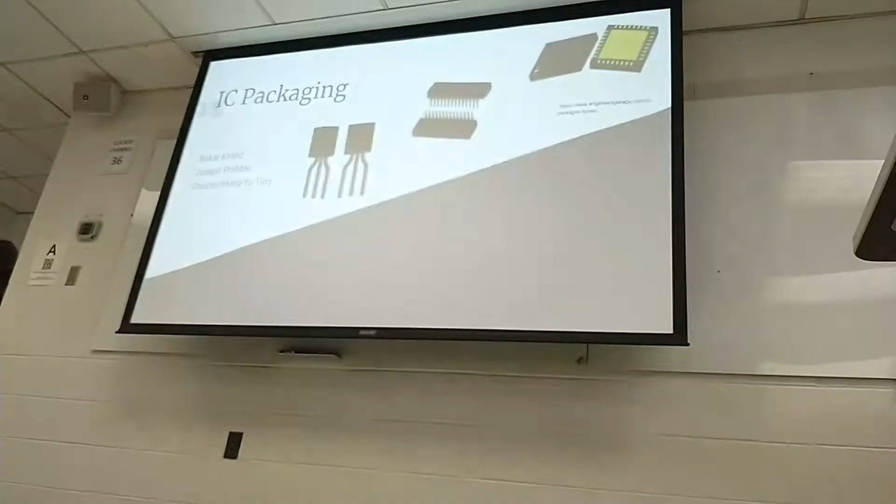Okay, so that's the first group. Bokar, Joseph, Chester, you all are here? Okay, please, come up front. Okay, so here's what we're going to do today. We're going to go through the last two group activities. And then we're going to talk about the exam. We're going to talk about lab reports. And we're going to talk about what a great opportunity this has been for us to work with you. This is our last lecture. And that's where we're going to end.

Okay? So you have about 15 minutes, longer than other groups because there's 3 of you, and 5 minutes Q&A, and then we start with the next group. Packaging is so important. You could have not 1 course, but 3 courses on that. Yes, that was the thing that we got into actually. Now, before you start, the rule of thumb is, and I want all of you to understand, hopefully those who are going to go into hardware, you always design the package at the same time with the electronics and the chips. If you design the package at the end, it's a 100% guarantee that you fail. Yeah, we're actually going to go over that too. Remember that. This is a golden lesson I learned the hard way. So take it with a lot of value. Okay, go ahead.

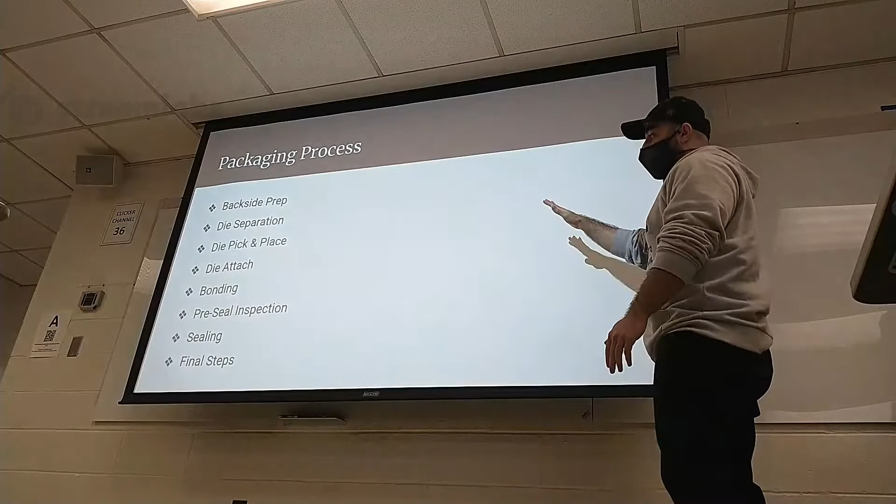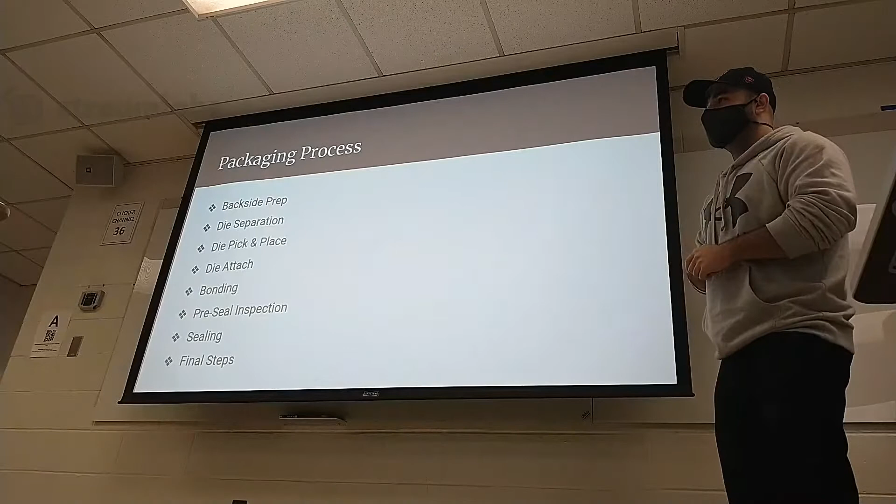So this is the whole packaging process. We have to go through these processes in order to get a complete package. But we are doing this in the context of electronic chips, right? Because this whole recipe changes dramatically for some other applications. Some of them will stay the same, but it doesn't necessarily follow the same order. Yeah, we have a slide at the end that basically goes through this.

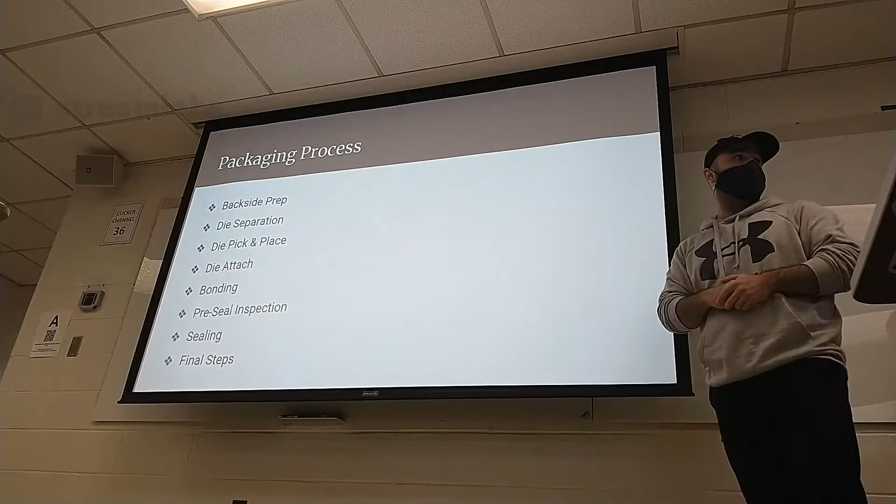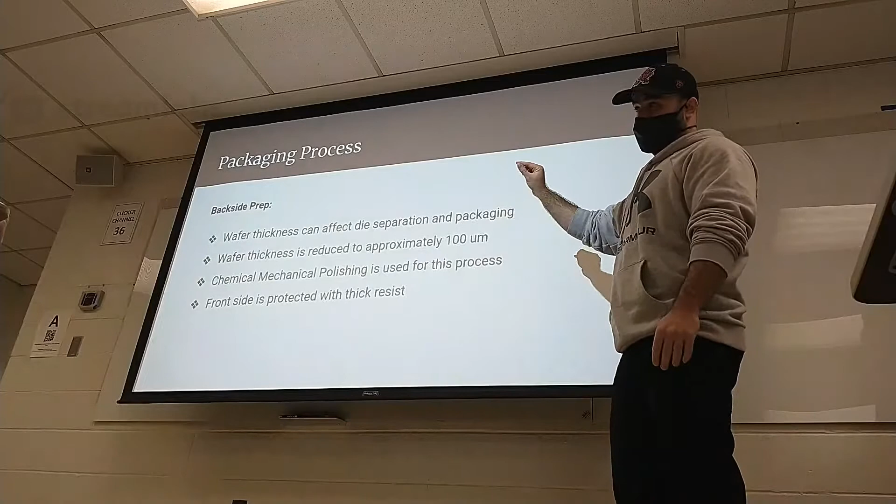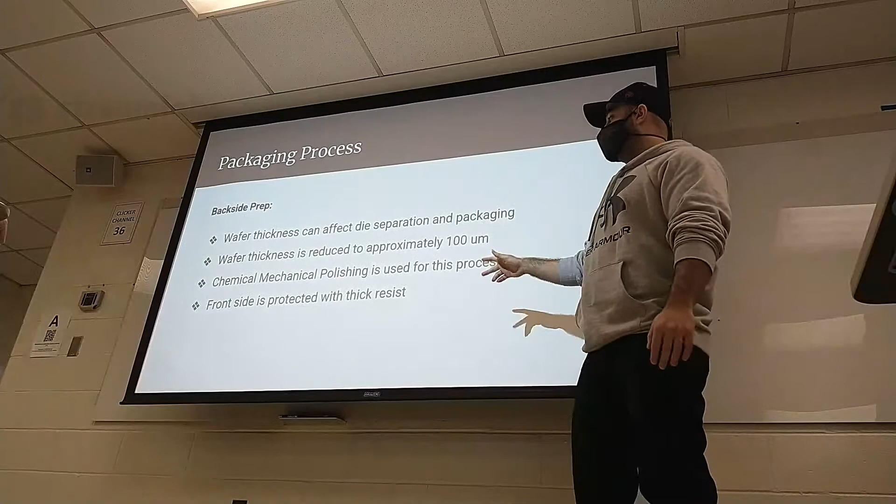So this is the packaging process. The first one is backside prep, basically the backside of the wafer. The wafer thickness can affect the steps that follow, which are die separation and packaging. So we reduce the thickness to approximately 100 microns, and the technique we use is chemical mechanical polishing, which was discussed by the other group. When we do this, we have to cover the front side with a thick resist.

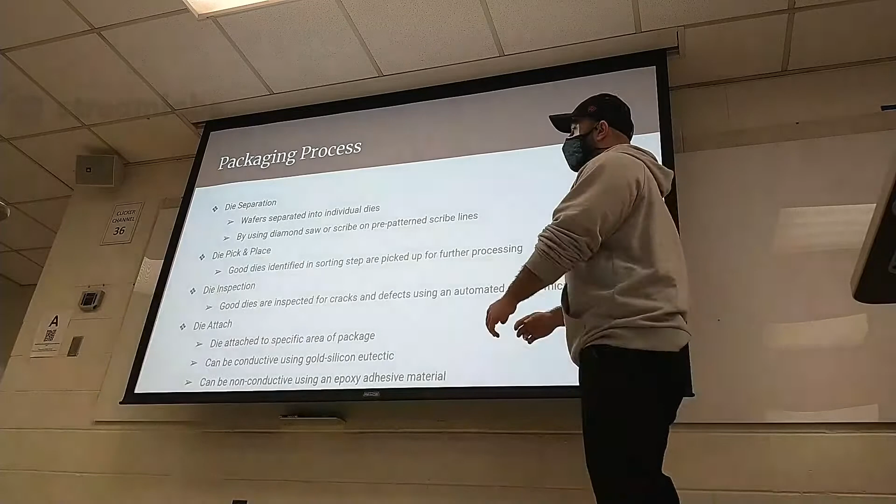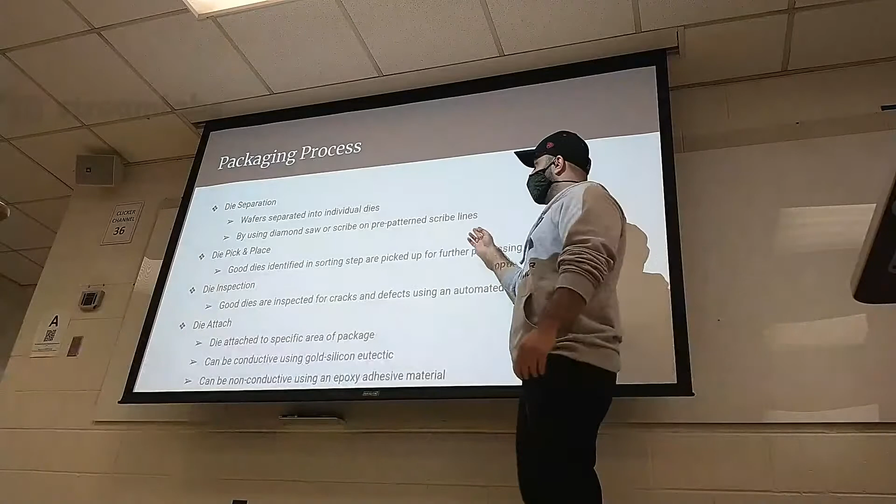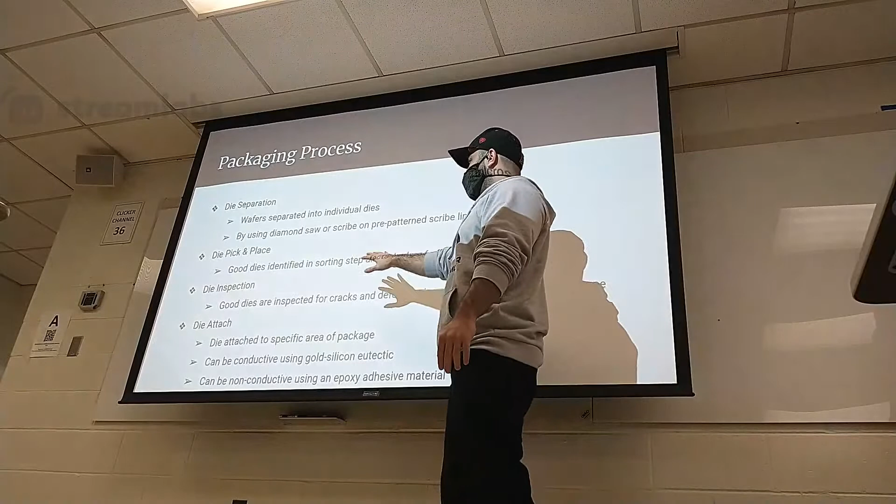The next step, after we prepare the backside, is die separation. We separate each die on the wafer using a diamond saw along a pre-patterned scribe line. After that, we pick and place the die. We identify the good dies from the sorting step. In the sorting step, each die gets electrically tested, and the bad ones get marked.

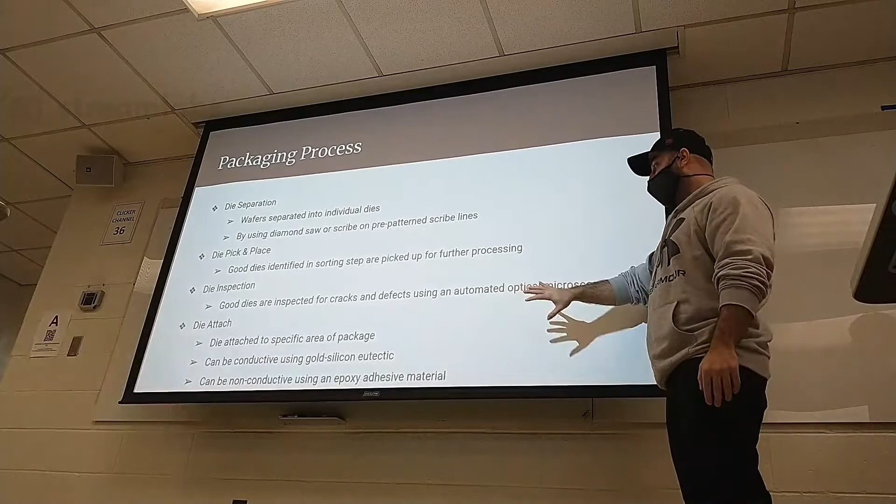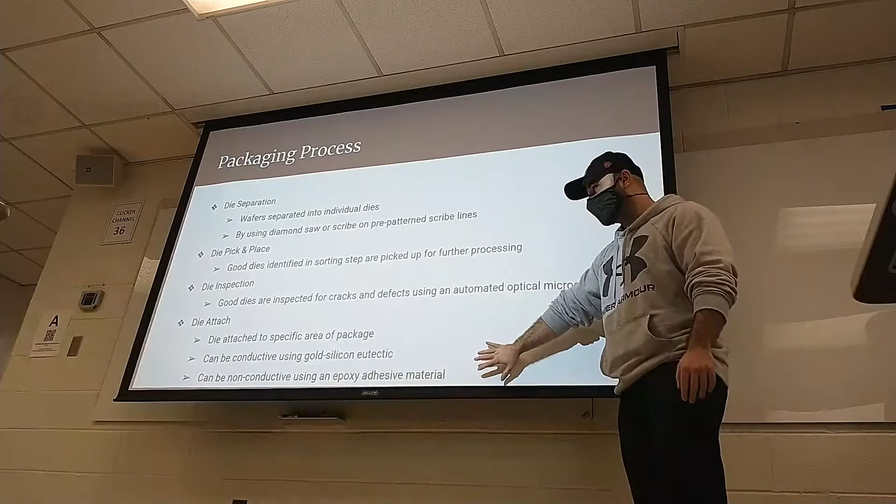Once we pick the good ones, the next step is die inspection, where we look for cracks and defects on the dies, and this step is handled by an automated optical microscope. Once we're done with die inspection, we go to die attach, where we pick the good ones and put them on the package.

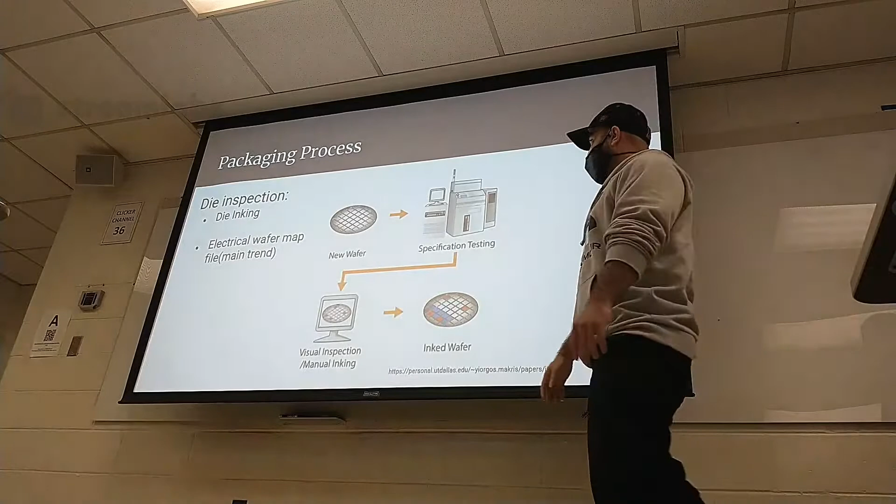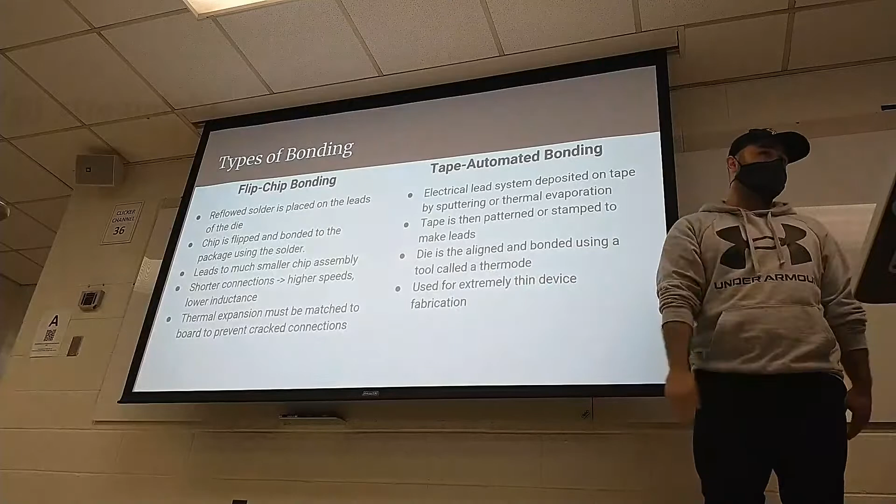And in the next step, we're going to be talking about the bonding, how the bonding is going to work. And I'm going to pass it down to my colleague. He's going to explain how that process is done. Hey guys, my name is Joe. I'm here to introduce just some types of bonding that can go into IC packaging.

Now, bonding is one of the most important steps in IC packaging. This is where the leads from the IC are actually connected to the board. So one of the types of bonding I'll talk about is flip chip bonding, which is basically the reflowed solder is put onto the leads of the die, and then the chip is flipped, hence the name, and bonded to the package using the solder. So hot air or heat is applied to melt the solder and establish the connections.

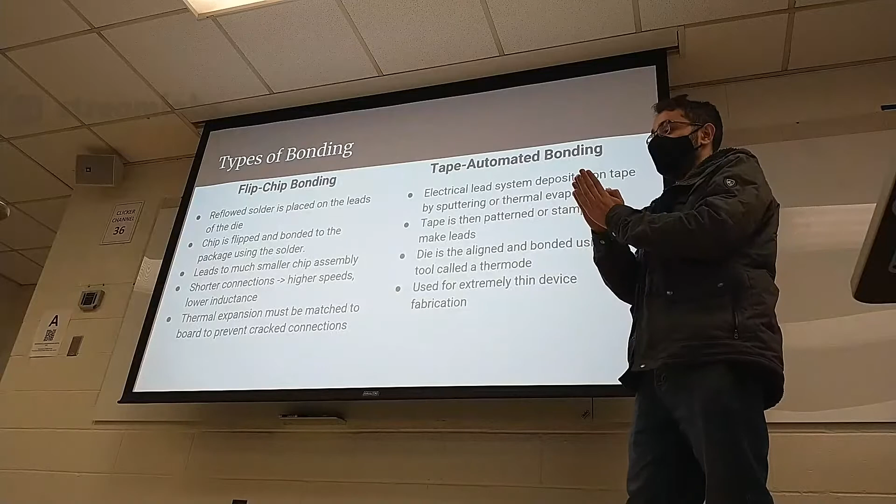This leads to much smaller chip assemblies because you can have much denser connections, and since you're not really having wire, it's mounted directly to the board. That also reduces space as well. This leads to much shorter connections, which is higher speed and lower inductance. But one disadvantage might be that thermal expansion could occur. So you have to match it to the board to prevent cracked connections.

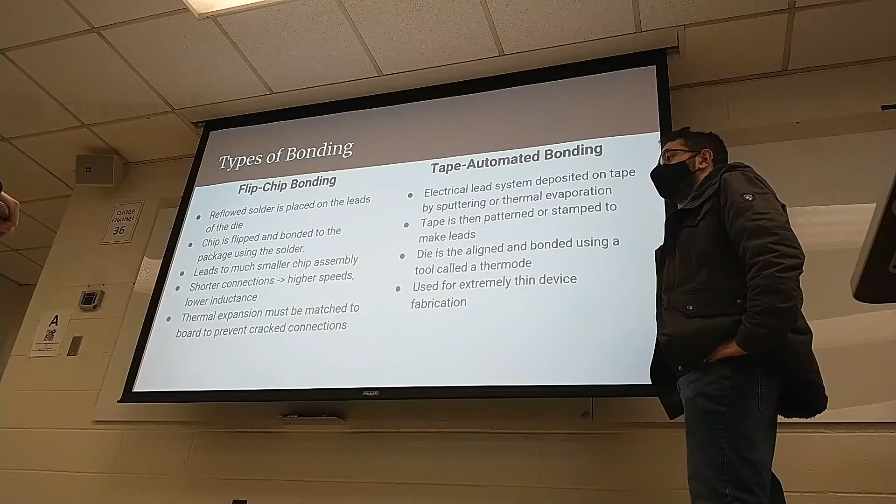So this electronic chip needs to work at 110 or 115 degrees Fahrenheit in Death Valley, and it should also work in minus 25 degrees in Minneapolis, Minnesota, right? So that's what you mean by thermal variation. Yes. Because if any of your package electronics in your iPhone goes through some form of cracks, that's the end of the product. Exactly. Because you can't go back. Yeah. I'll go into detail in another slide, but this is a type of surface mount, which means once it's done, it's done.

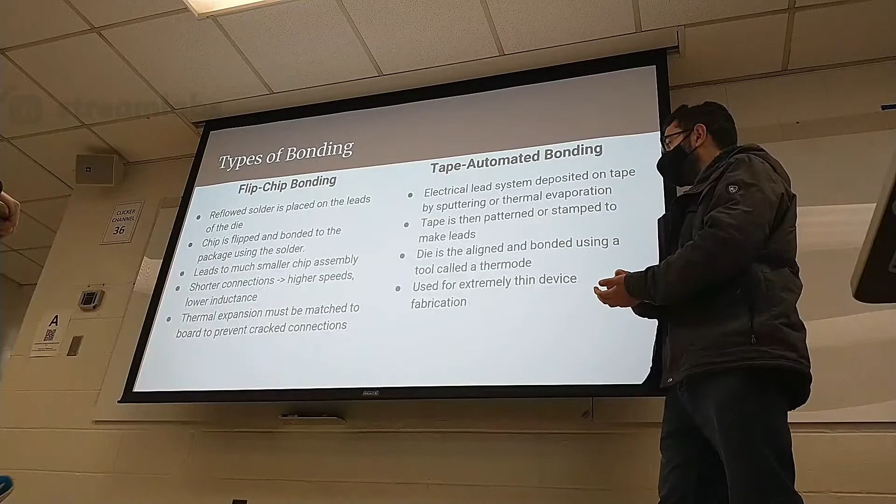So another type of bonding is tape automated bonding, and that is where the electrical lead system is deposited onto a tape via sputtering or thermal evaporation. The tape is then stamped or patterned to make the leads to the actual IC. The die is aligned, and the die is bonded using a tool called a thermode, which is basically like a hot press. It actually forms the bond. And this is used for extremely thin device fabrication. Since it's pressing it down and establishing the bonds, that makes it nice and thin.

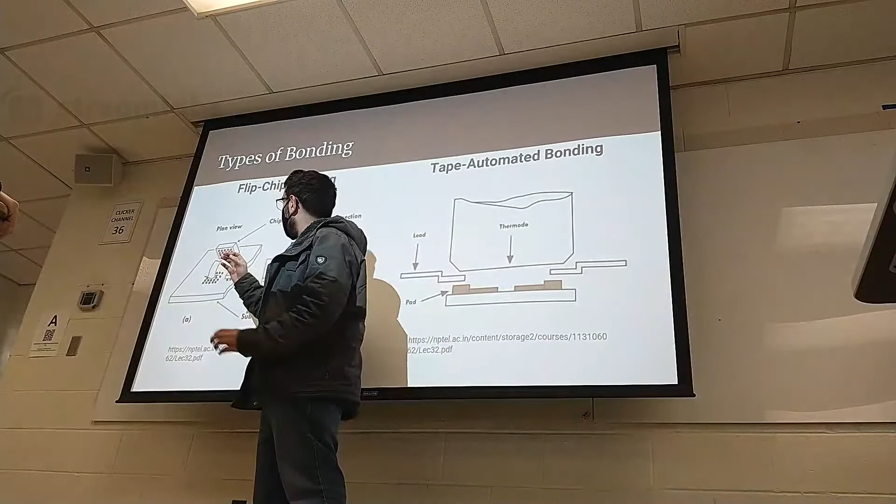And then here's another representation of the flip chip. So this is the solder which is deposited on the IC, flipped, and it establishes the connection right there, as you can kind of see. I'm going to pass it over.

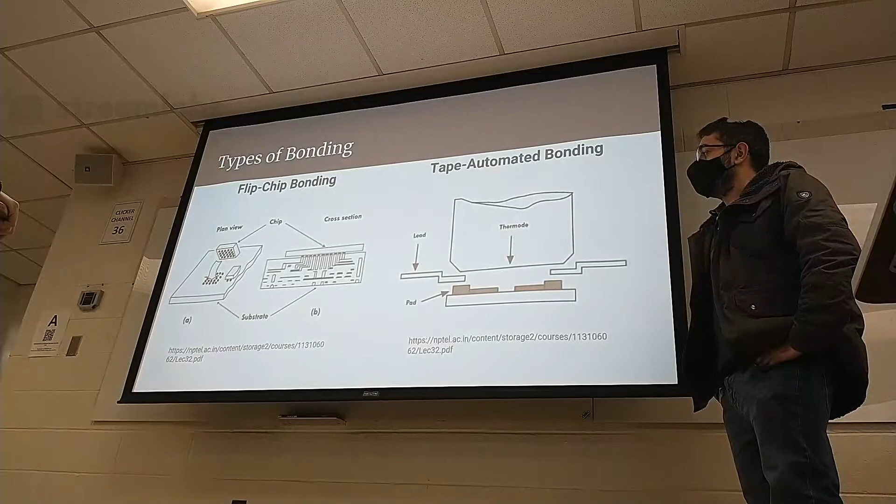So if any of your layers that you put in to make your electronic chips and your transistors has exceeded the stress, remember we talked about stress, compression, and tensile, halfway through the semester? If any of those layers exhibited more intrinsic stress than it's supposed to, guess what happens when you put the pressure for this flip chip bonding? Cracks, right? Exactly. So this is how the final product comes to realization. If you have not done your reliability tests at each layer and characterized it, it's going to come and haunt you at the end.

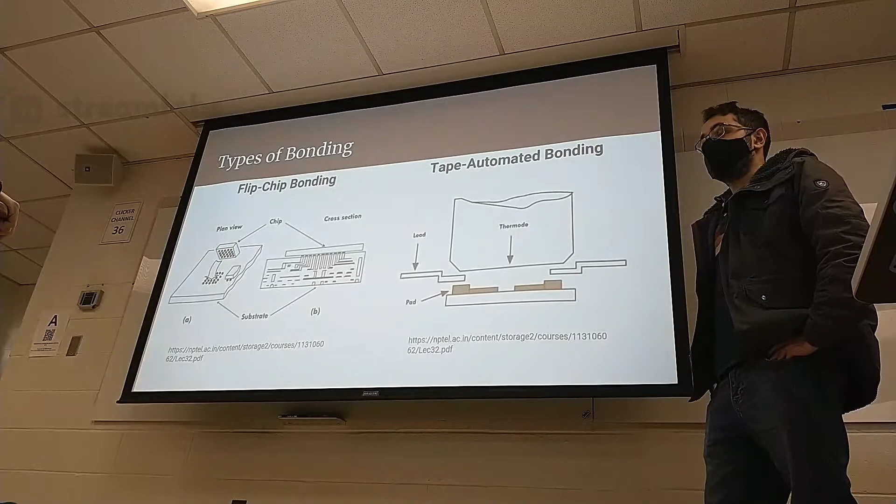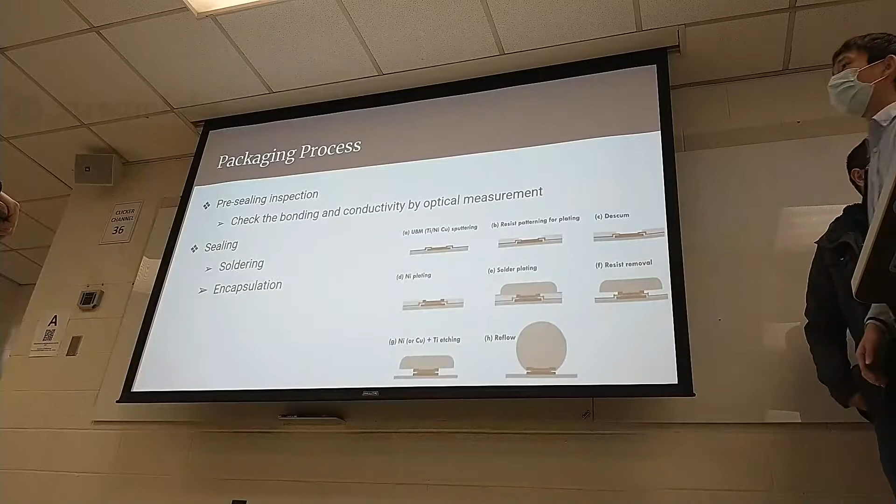Exactly. Just as Dr. Gatsi said, there's a lot of planning that needs to go into every single step. So my colleague Chester is going to take over. Hi, I'm Chester. And that comes to the pre-sealing inspection. You want to check the bonding is not missing, and also that the conductivity still works.

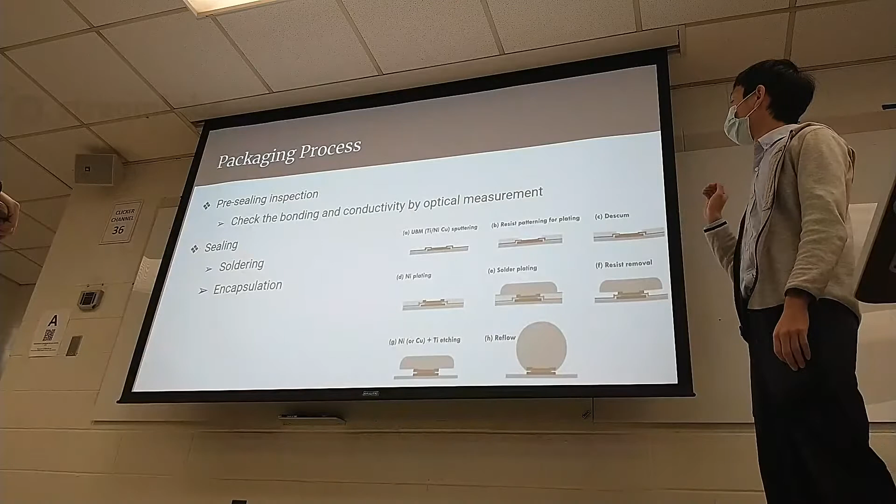And it goes on to sealing. The sealing includes soldering or encapsulation. The picture is from the textbook talking about the soldering. It goes over sputtering and patterning and plating, descum, nickel plating, solder plating, resist removal, etching, reflow. It's pretty much similar to when we do the semiconductor. And I split the final steps into two: one is the inspection part, the other is the yield.

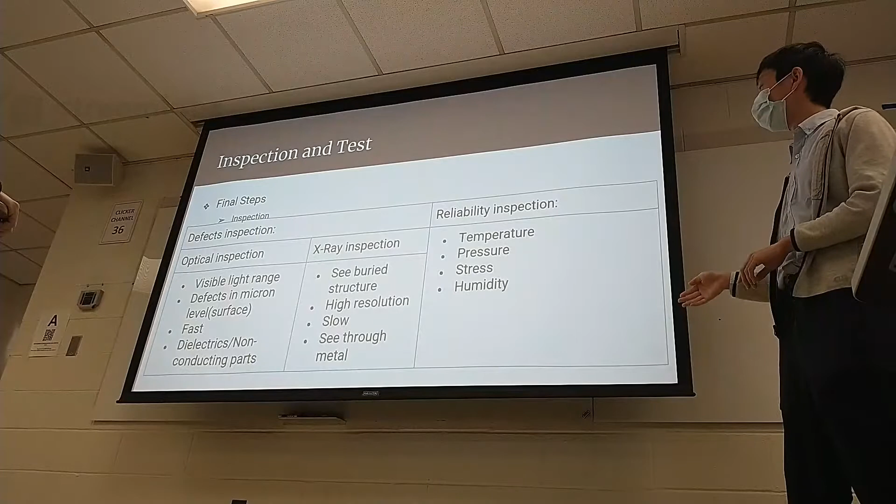In inspection, we generally do defect inspection by optical inspection or X-ray inspection. With optical, you see the packaging in the visible light range, which finds defects at the micron level. It is faster, but it can only look over the surface. So some may require X-ray inspection. It sees through the structure, so it has high resolution, but it also takes longer. But it can see through metal to check that all the conductivity works. Some optional inspections are reliability inspections, covering temperature, pressure, stress, and humidity, and more wherever the company wants.

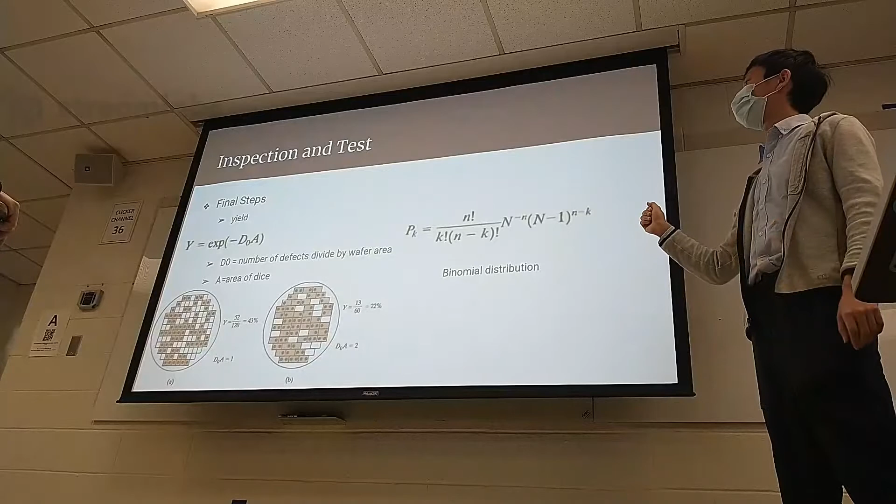And the other part is the yield. The yield equation comes from the binomial distribution, and it's basically the exponential of negative D0 times A. D0 is the number of defects divided by wafer area, and A is just the area of each die.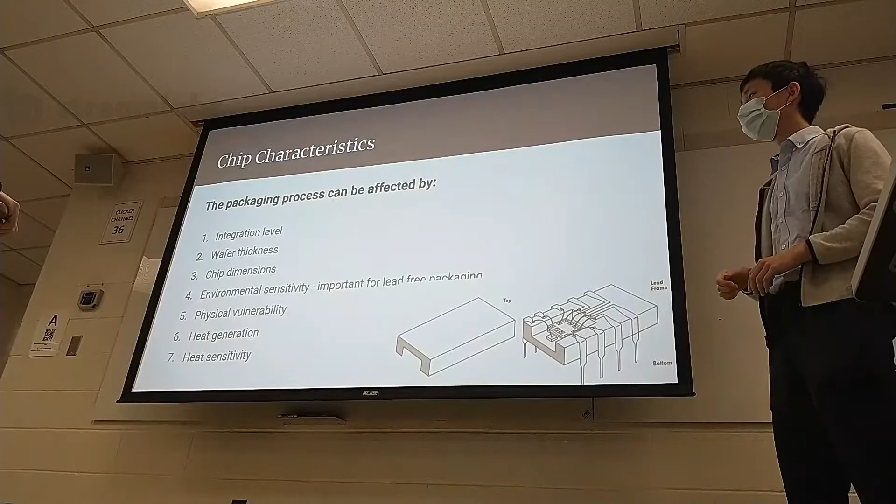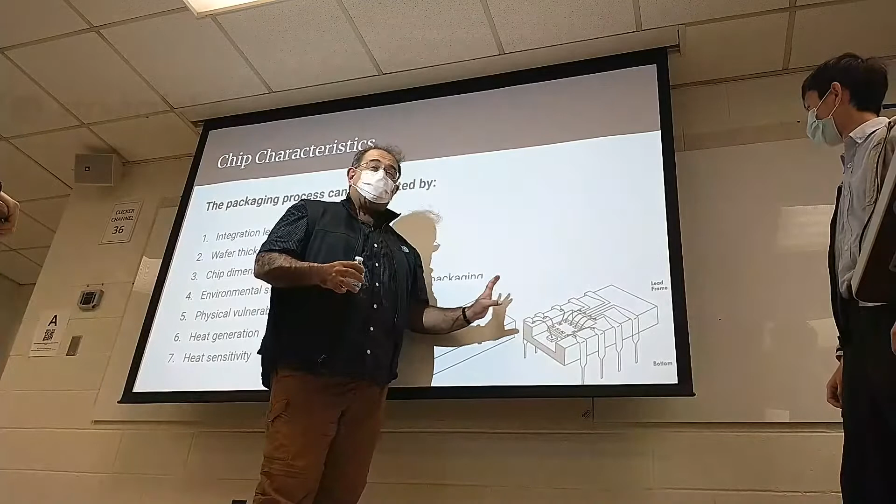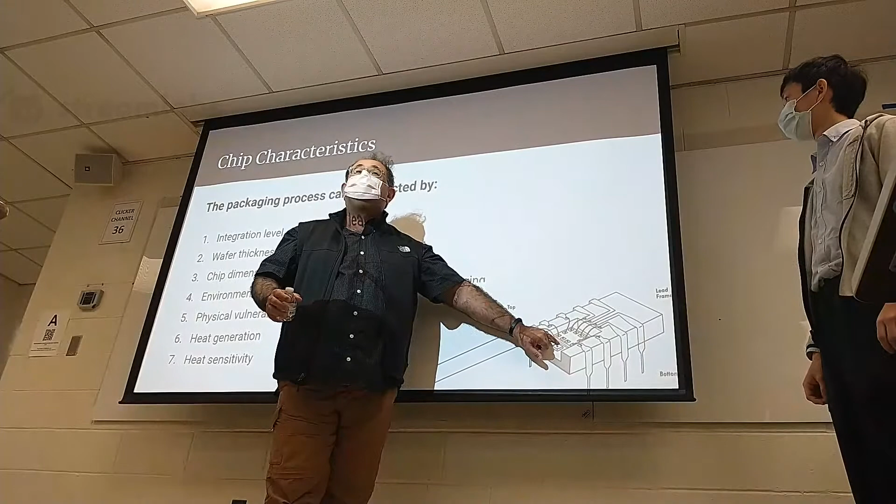Right. So can you go back to your previous slide? I just want to point this out. The wiring steps that take place before you encapsulate the whole thing and finalize the product, that by itself is a field of study. Because when you bring this very thin diameter gold wire down, even when you use a robot, you need to make sure that it adheres well and it adheres permanently, and it could stand things like vibration, temperature differences, and other stimuli or forces that could really detach it at any given time, right?

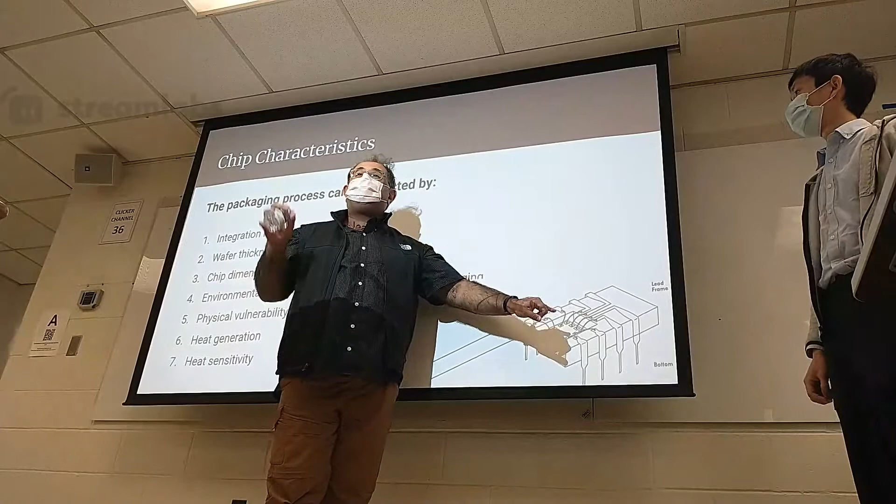So I just want to point this out that when people see robots doing this wire bonding, we don't use robots, by the way, in our research labs. We use what? Very professional graduate students. Okay? What they do is really the first time that this is happening, right? So it doesn't make sense to have a robot doing it, right? Robots are for mass manufacturing, right? Not for research.

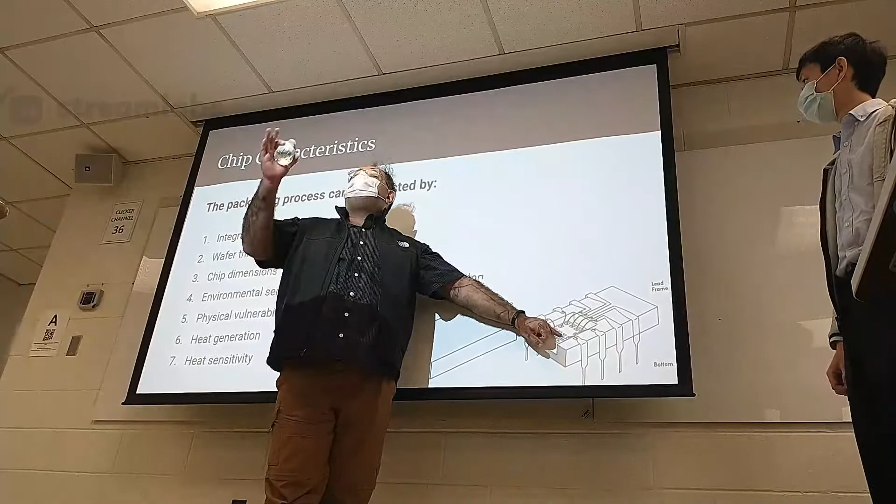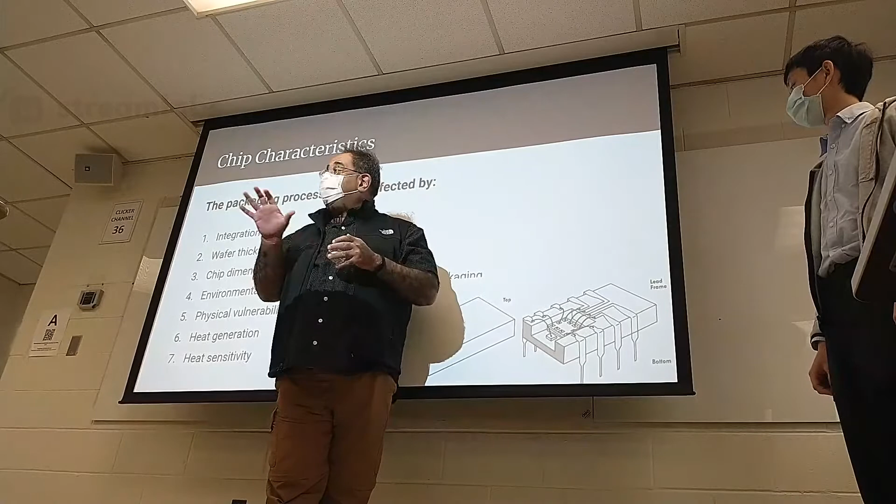But I want you to pay attention to this because you learn in this class as you're ready to put a layer on top of another layer, what did we emphasize that needs to be absolutely what? Clean, residue-free, right? And we talked about techniques like oxygen plasma to remove those residues. Well, guess what? Same thing applies here. Because this is a thin wire, and you bring it and you need it absolutely clean.

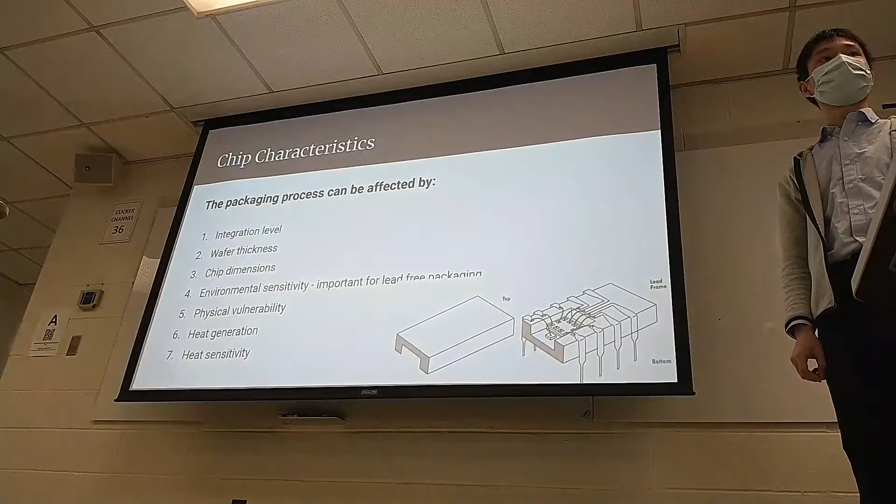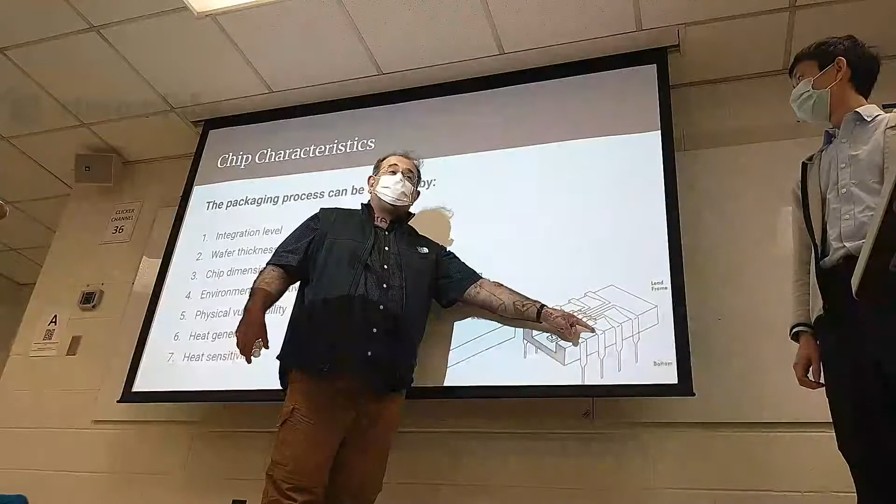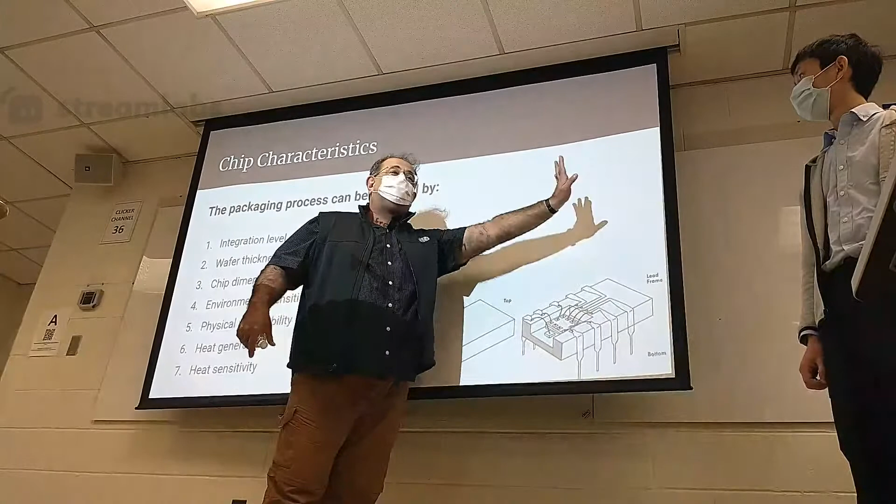Yes? It's an experience I've faced a couple of times. So you think that it's connected, but after a little bit of movement, it just comes off. How can we be sure? You go through, there are techniques to measure the conductivity for each of these. Yeah, but how? It might be connected, but it's not solid. Well, there are a series of, as I said, mechanical and electrical tests that they do in industry before they do the last layer. Okay. Because once you put this in, as he said, it's done. It's done, right? So you better make sure that these layers are tested.

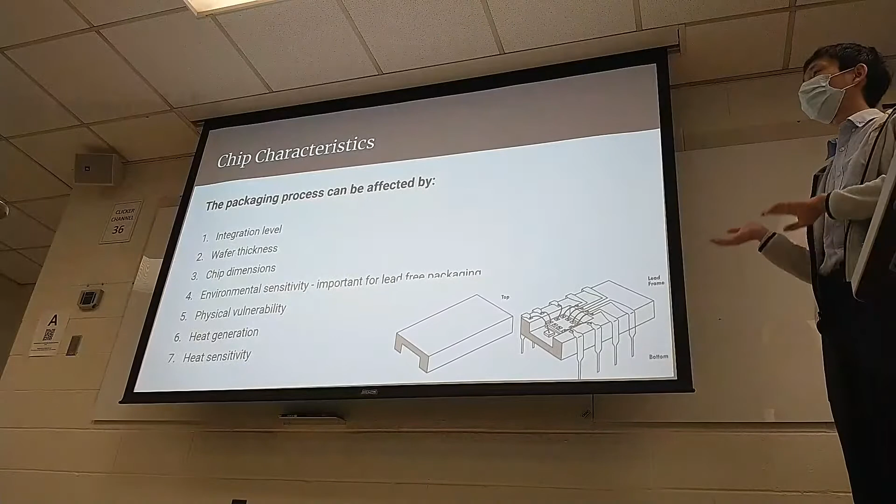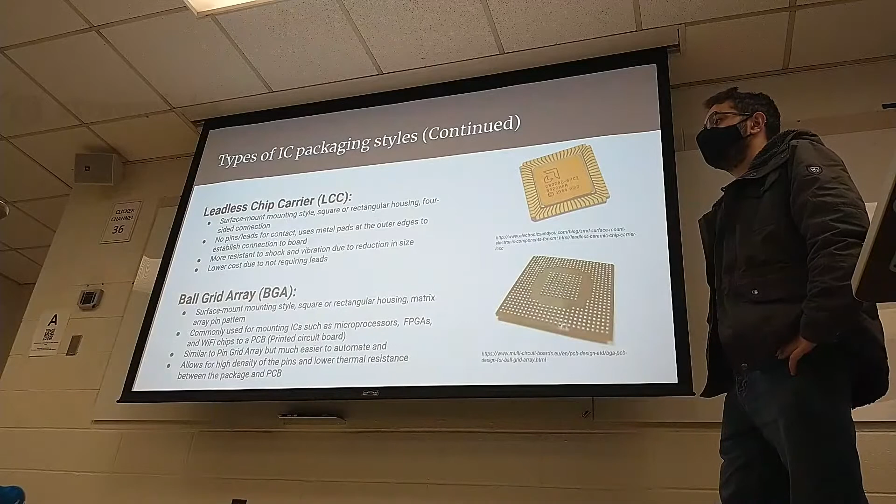So this whole pin idea, when it started in the semiconductor industry and for electronic chips, has also gone through a series of evolutionary steps, right? As you nicely showed, two different examples here for flat electrodes versus pin electrodes versus different arrays of pins. But where I'm getting at with this is that, when I look back, 30 or 35 years ago, it was these pins that inspired folks in my field to make those very narrow, tall microneedles by using bulk micromachining that you learned a little bit about, okay?

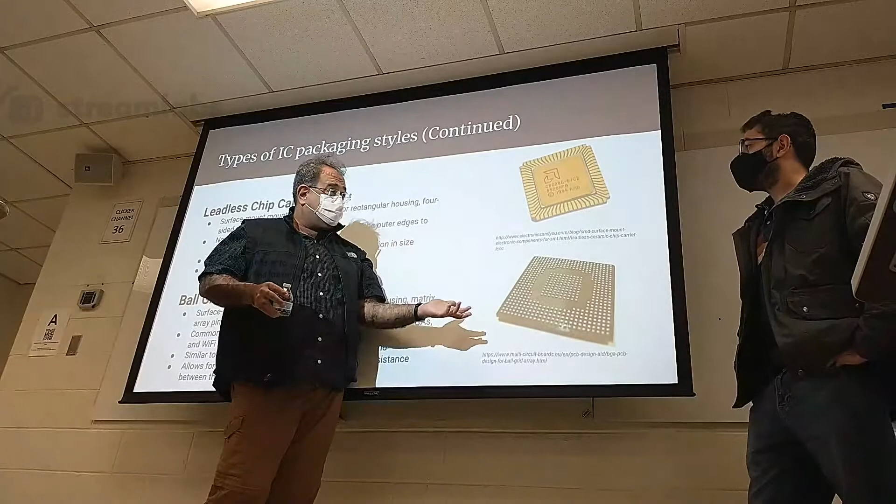Bulk micromachining, remember, is removing the silicon through some form of a wet etchant, like KOH etch. And those tall electrodes ended up being an array on a chip, and enabled neuroscientists to do deep brain stimulation. So today, the pacemakers that, believe it or not, they're installing in the brain to fight Parkinson's, because it stimulates the neurons every 2 or 3 minutes, use those tall electrodes, right?

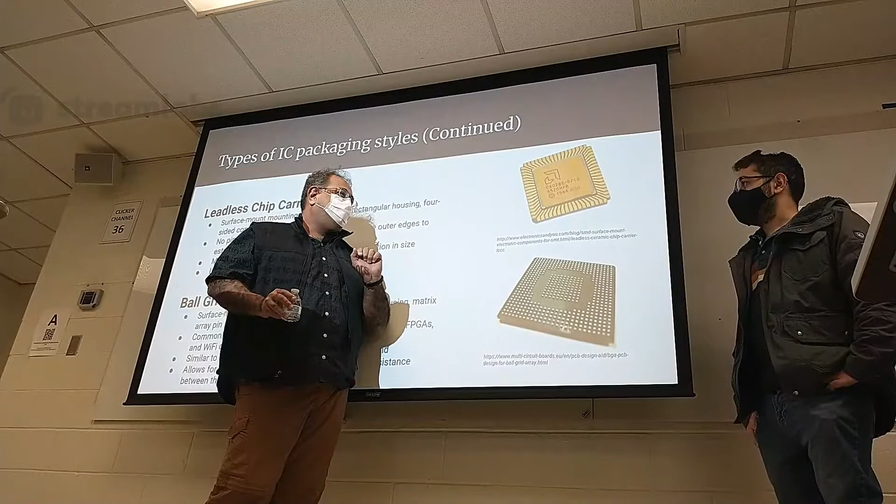So we went from this to that. Do you see what I'm saying? Exactly. So it's a really nice inspiration, and that inspired us to challenge ourselves to make those electrodes in a different way for a different application.

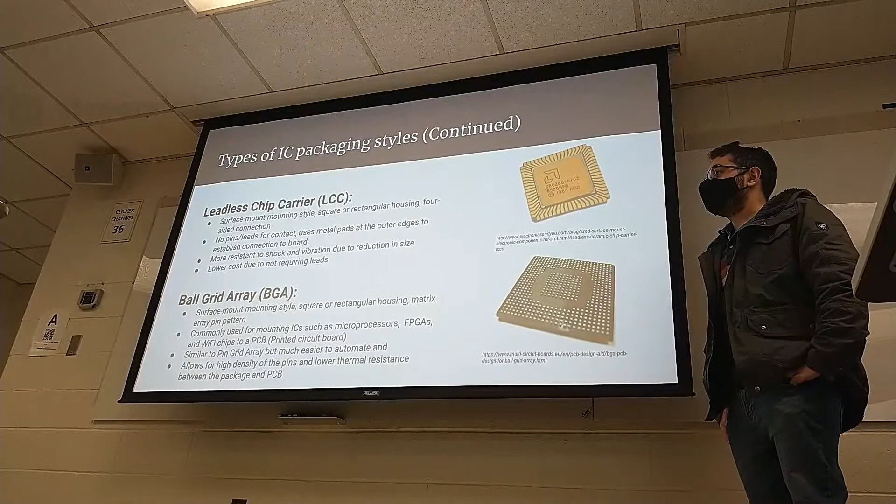Well said. Is this the last slide? This is the last slide. Well done. Great job. Questions? I've got small questions.

When you use the chips in your lab, there are many restrictions, that we cannot apply a high current or high voltage that will hurt the chip. Which part of the chip will be hurt, or why? I know the large current will generate heat. What exactly is the question? I think he's asking about the limitation of current that we can apply on the chip, right? I think that depends on the circuit.

Most of the circuits that we have don't have a lot of abilities. You can't apply high current. If you go anywhere near maybe 1 milliamp or something like that, that circuit is gonna start to heat up pretty quickly. So the currents for these chips are normally very small, but I think you point out an important issue, because in power electronics, where they deal with high voltages and high currents, they have to worry about what you just asked.

So they need to make sure that those pins won't melt the layers, right? Because it draws more current because of that application. So power electronics, particularly for hybrid cars that use power electronics chips, need to worry about that. But still, I would argue that the currents are small, right? But it's a very important question that you raised.

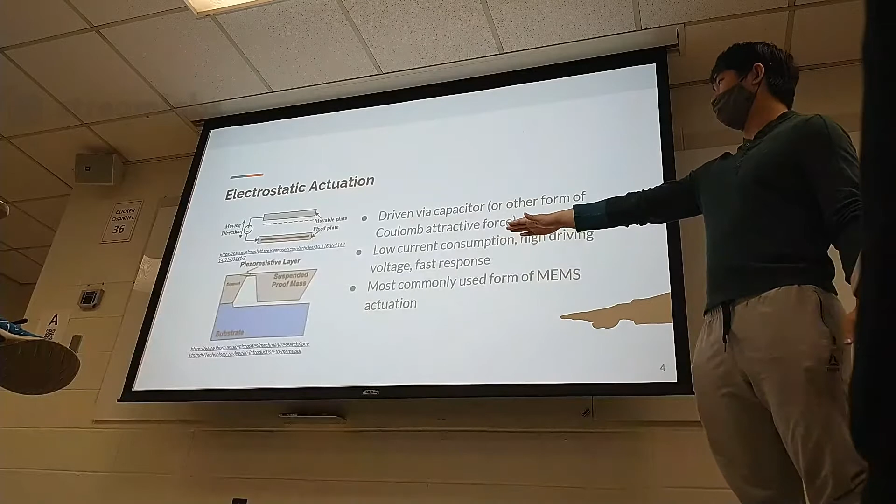The first method is electrostatic actuation, which takes advantage of electrostatic forces in order to create movement and force. A simple example: by taking a capacitor, you can generate an electric field or an attractive force to move the mechanical systems. If we put a capacitor plate on top of the substrate as well as one on top of the suspended mass and apply an input voltage to charge the capacitor, they will have an attractive force between each other which will pull the suspended mass down towards the substrate and create mechanical movement and force. Due to the capacitor design, this has very low current consumption, but could require a very high driving voltage in order to move the mass.

In order to generate sufficient force... due to its reliance on an electrical system, this has a very fast response and is the most commonly used method of MEMS actuation.

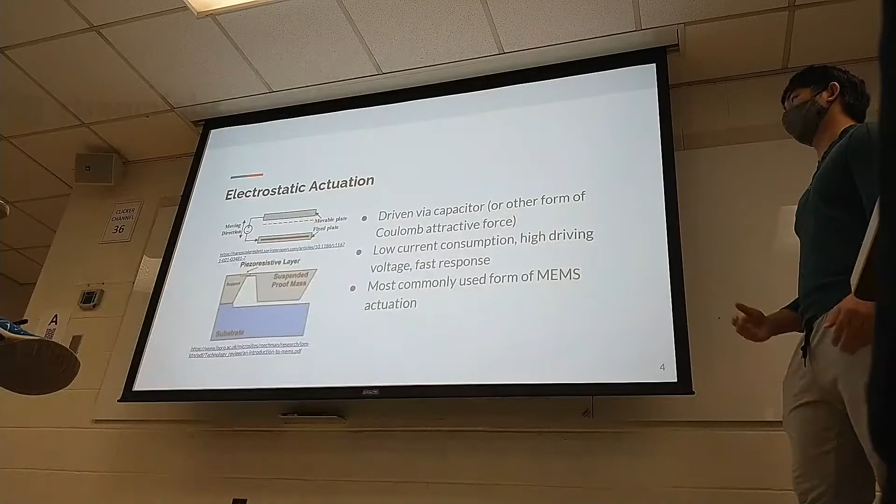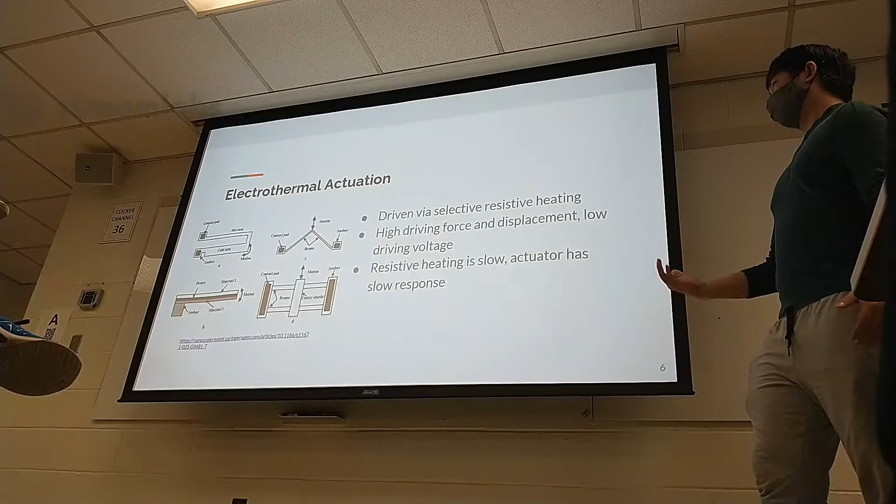The next main method of actuation that we use is electrothermal actuation, which, as the name implies, uses thermal heating effects in order to generate movement. The basic premise is to use selective resistive heating in order to heat certain parts of the structure more than others and create movement.

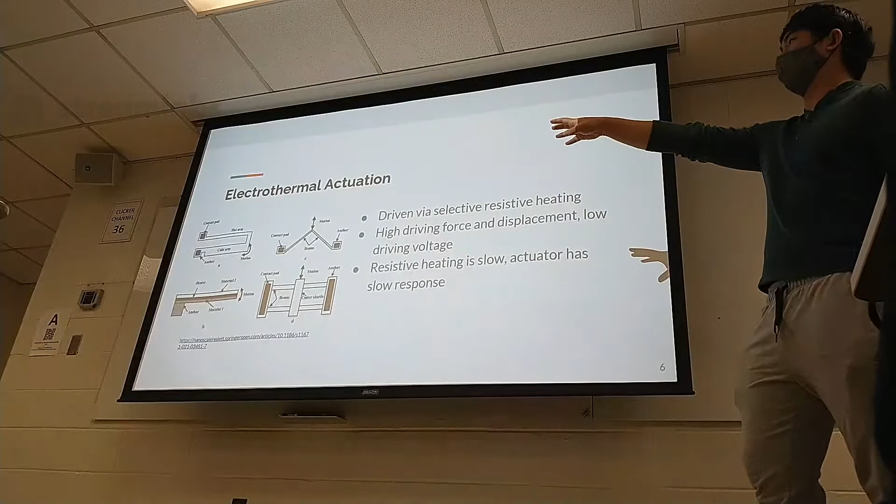For example, if we take the example in the top left, where we have a thinner arm and a thicker arm and heat them accordingly, the thinner arm will, because of higher resistance, heat up more than the cold arm and expand more, generating a curve towards the cold arm. A similar example is the top right, where we have two arms that, when heated, expand, pushing the apex outwards.

This can generate a very high driving force and displacement due to thermal expansion being a very powerful method, with a relatively low driving voltage through resistive heating. However, since this relies on resistive heating rather than electric components, it has a much slower response time, but is capable of very high displacement and force.

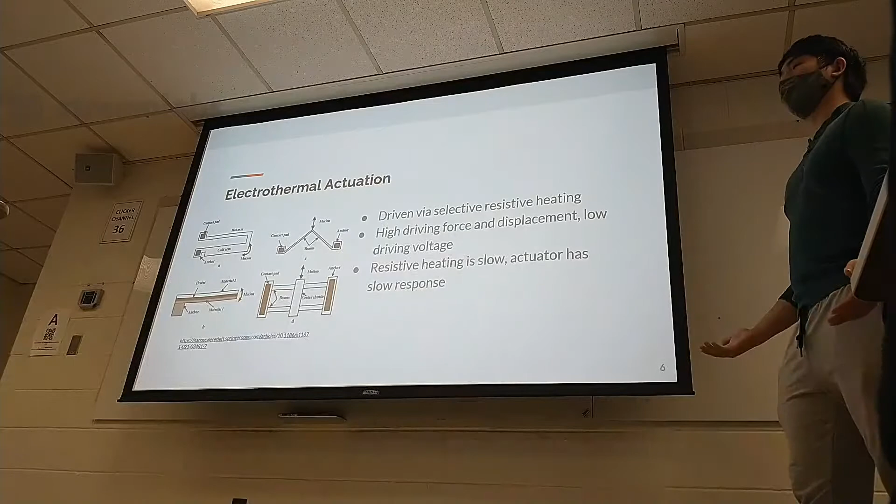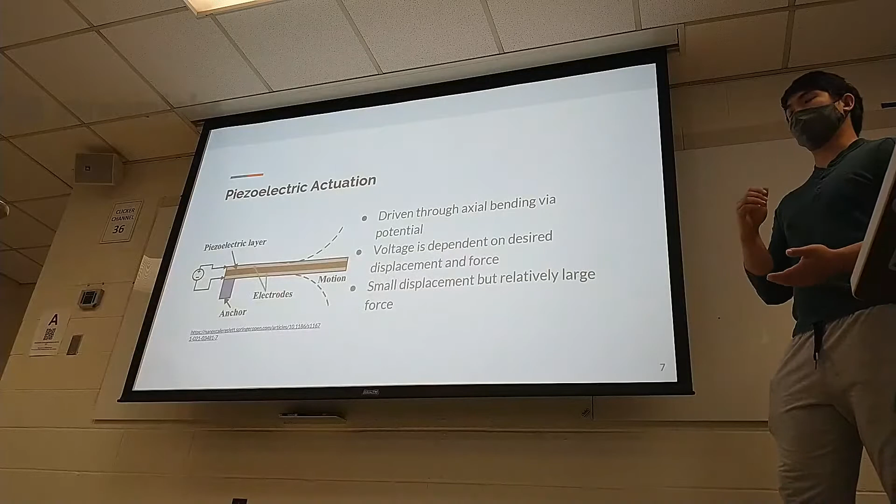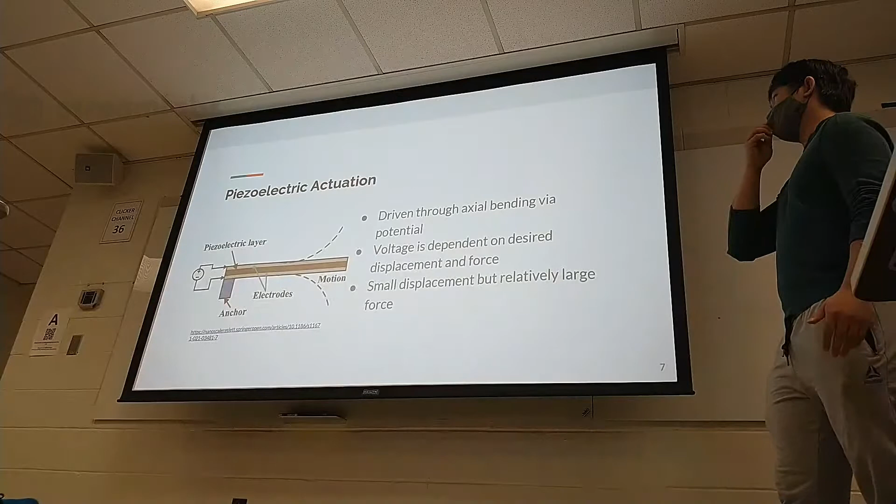The final method I'll be talking about is piezoelectric actuation. This uses the same concept as piezoelectric sensing, where displacement in a crystal is correlated to the voltage across it. While we usually use this in a sensor, where compressing the crystal generates voltage we can sense, we can actually use it the other way around, applying voltage across the crystal, which encourages it to bend. This generates actual movement, allowing the overall structure to curl in the direction we want.

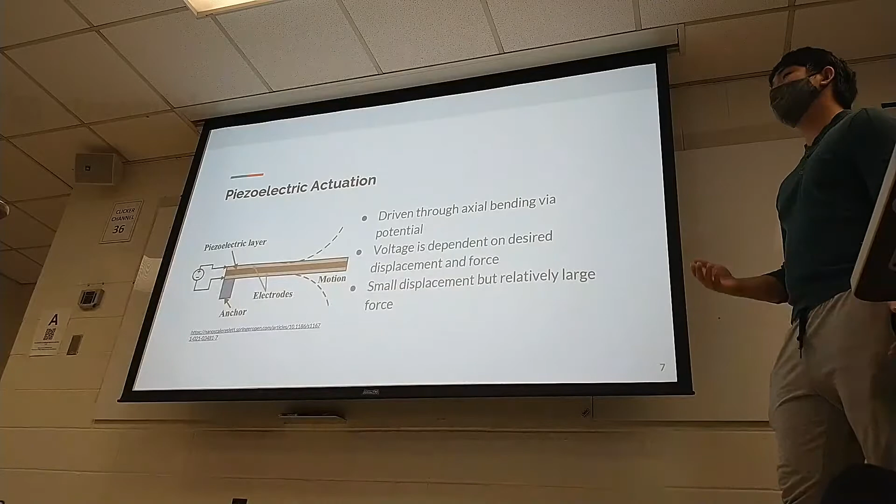So compared to other methods, this suffers in terms of not being able to produce as much displacement, but it can generate extremely high forces.

Very good. Wow. Yeah, I'm going to talk about fabrication.

The fabrication of MEMS is pretty similar to what we've learned about integrated circuits. It has many of the same steps, like oxidation or sputtering, that we've used in our lab before. The main three steps for fabrication are bulk micromachining, surface micromachining, and high aspect ratio micromachining, also called HARM.

First, bulk micromachining. We have learned this so many times in our lab and in our class. This is the oldest way to do it. See, now it's all coming together, yeah. Right, making sense. Yeah, hallelujah.

This is the oldest micromachining technology. We just soak our substrate in the chemical and do the micromachining and etching step. Of course, it will cause chemical waste.

And then surface micromachining, this is the stuff we're learning these days. First we deposit a layer of oxide, then the structure we need to build, and then remove the oxide under the structure, and our surface micromachining is finished. It has precise dimension control, vertically and horizontally, and can create a large variety of structures, but the tricky property of surface micromachining is that we have to test the structures after we've finished them, because their properties are unknown beforehand.

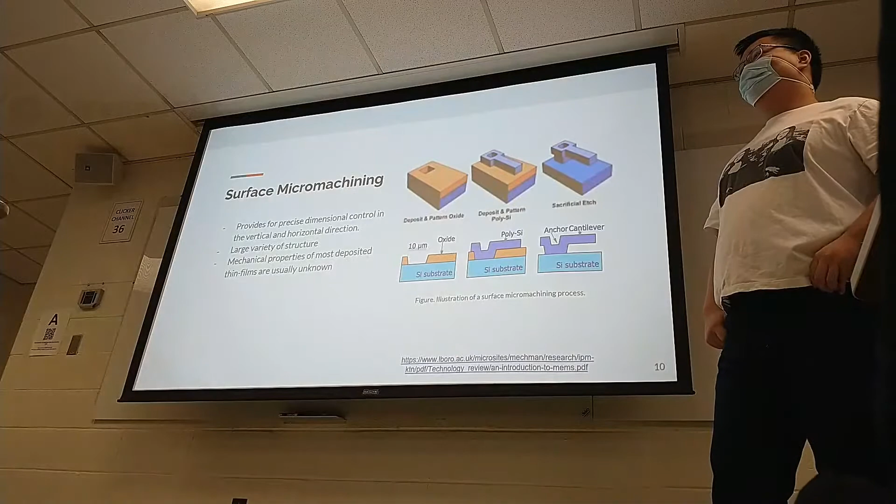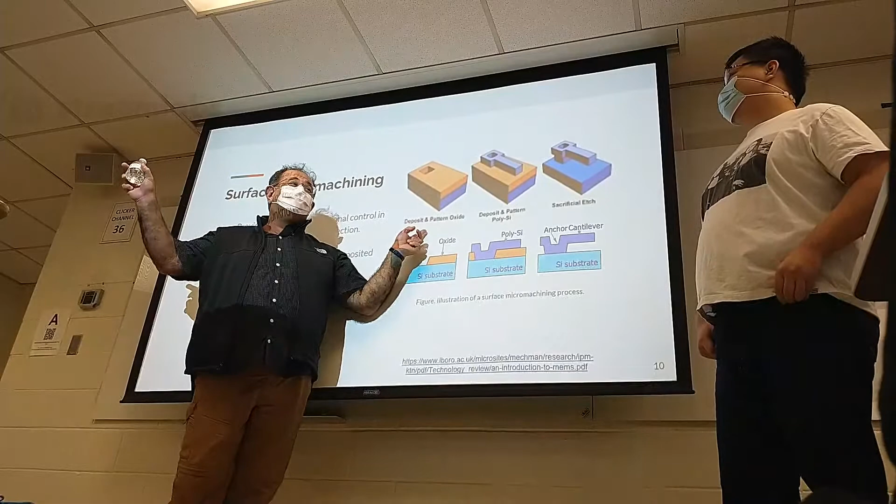He says you put a layer down, you subtract a layer. Well, this is what you did in this class, this is how you make transistors, with the exception that in some cases here we don't do the doping, but in some cases we do. So my point here is that surface micromachining is the process by which you could make both sensors and electronics. You could make MEMS and you could make electronics. This is what's at the heart of what you have in a lot of your gadgets, from Fitbit to iPhone to tablets. Such a basic idea.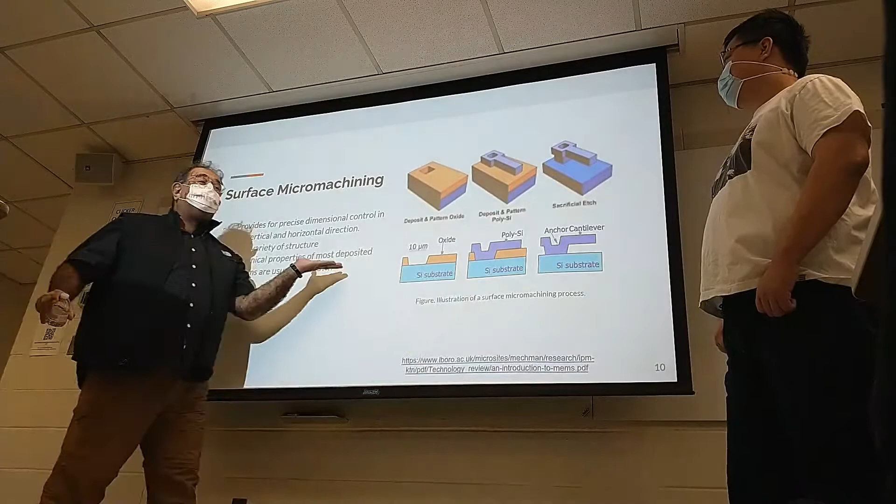Yes, that's right, because the packaging is the same, right, with slight changes, right? All the principles apply, but more importantly, you could make them all at the same time. Are you with me? You could make them all at the same time. In fact, there are foundries where you could sit in front of your computer. My colleague and good friend Pamela Abshire, some of you had courses with her.

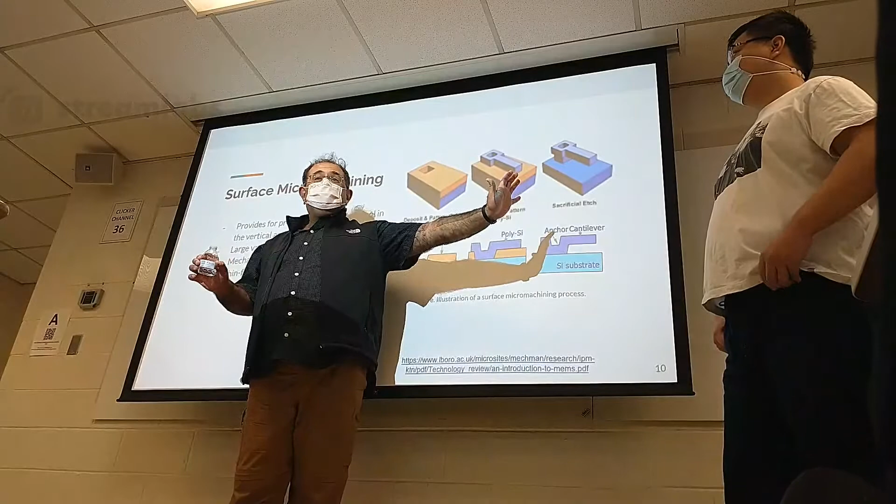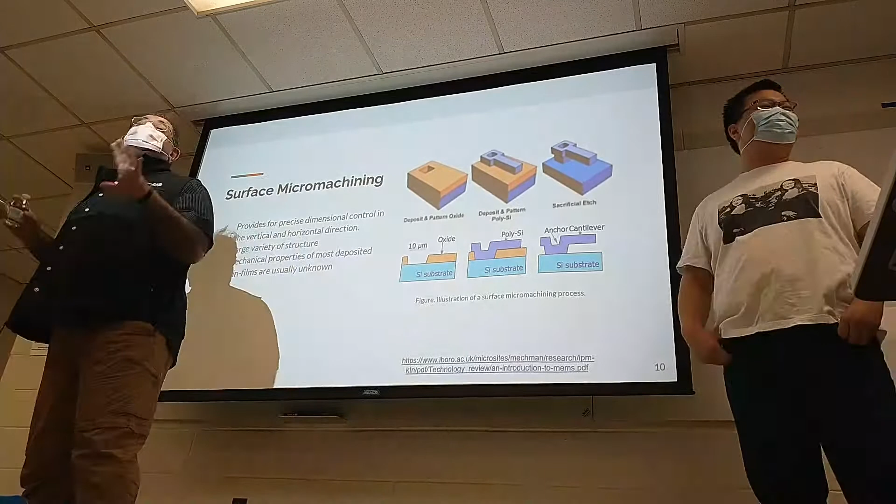So is she MEMS or not? Of course she is, she's a system. She's a system person. I'm also a system person. Okay, go ahead.

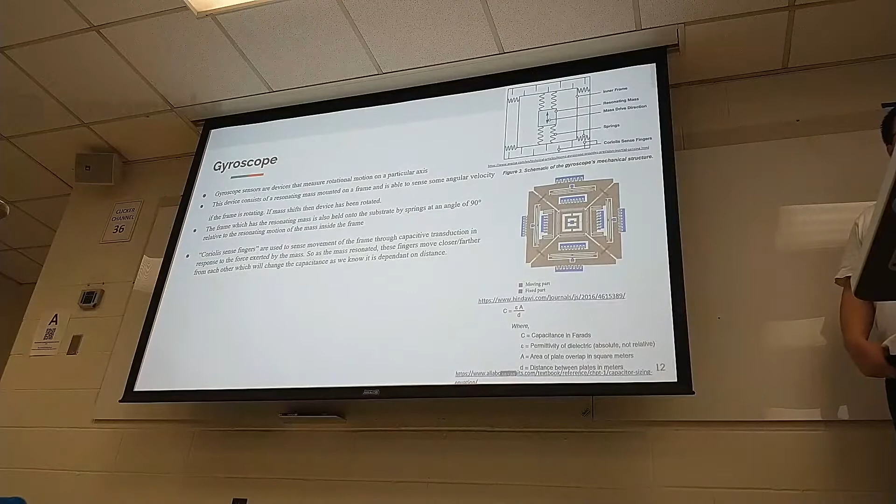Okay, so now going to the gyroscope, which is the first of the two devices in MEMS. These are sensors that measure rotational motion on a particular axis. This device consists of a resonating mass mounted on a frame that can sense angular velocity if it's rotating. There's many different types, but the main idea of a gyroscope is that when there's rotation, this mass in its frame is shifted as the rotations per second change.

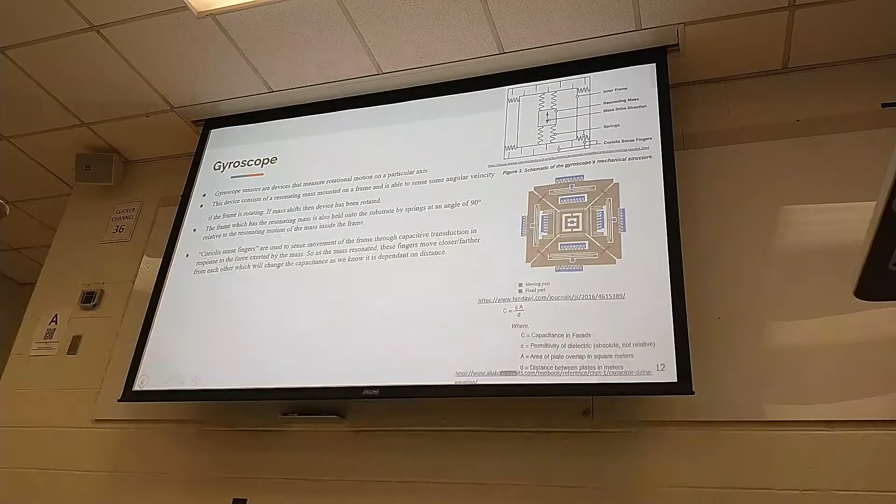So you can sort of see here, this is kind of like a schematic of it, and a little more of how it actually looks here. This right here would be like your resonating mass in the frame that it mounts on. And then you have two other kind of connectors that are put perpendicular to how this one moves, and that's kind of how you get the X and Y axis, how they move.

I'll go into it in a second of what these are, but these are Coriolis sense fingers. Essentially what these do is as this shifts around, you have a capacitor here, and as they move, the capacitance changes since they get farther and closer, because it's dependent on distance from each other. You can take that and actually measure its capacitance, and that's how you can tell how much it moved from this rotation.

So the Coriolis effect.

Really quick, for example, if you had a rotating platform, and you were standing close to the center of it, your speed is relative to the ground. If you start to move towards the edge of it, you would notice your rotational velocity would change. You probably know this, but this is the main principle of physics used for this device. So it's the same exact idea here, like when it's on that chip, as if your phone is rotating its gyroscope, it would do the same thing, this would shift around on the inside.

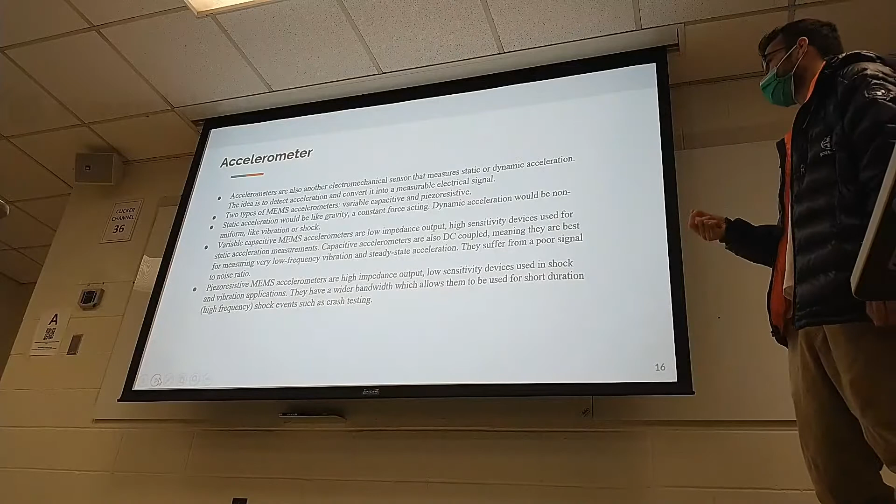Piezoresistive accelerometers are high impedance output and low sensitivity. These, like I said, are used in shock and vibration applications as well. They have a higher bandwidth, so they can be used for short duration, high frequency shock events. Structure of this device.

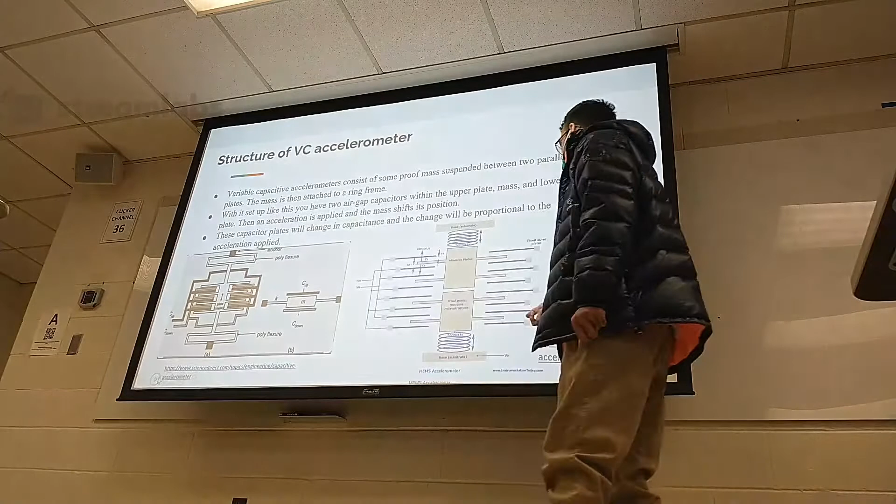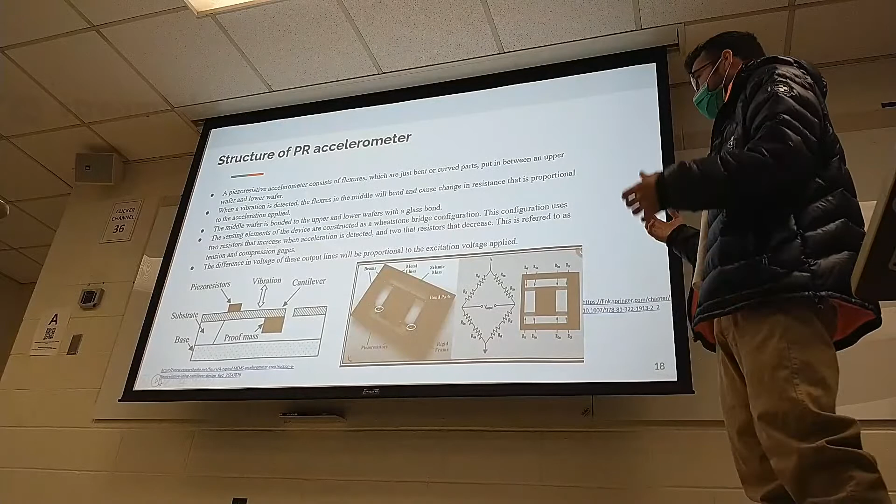The sensing elements of this device are used with a Wheatstone bridge. When the flexures bend, two resistors increase and two decrease at a time. These are referred to as tension and compression gauges. The difference in voltage of the output lines is proportional to the excitation voltage applied. That's right.

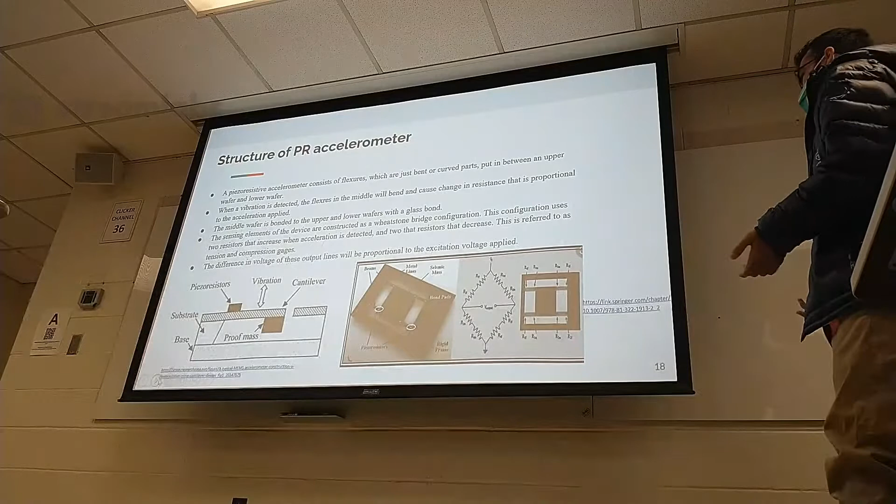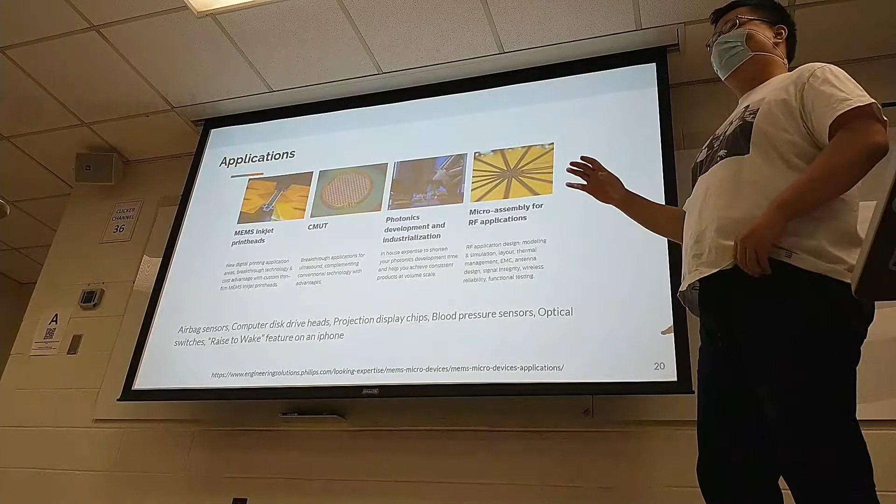For applications, there are MEMS everywhere in our normal life. Yeah, I call it the quiet revolution. Because it's no longer the future. Our lives are so dependent on it. When I Googled MEMS applications, the first thing I saw is the Philips homepage.

It introduced so many kinds of products that use MEMS, like the MEMS inkjet printhead, CMUT, and so on. There's a page of 16 different kinds of products that use MEMS, and it's also used in airbags, computer disk drive heads, projection display chips, blood pressure sensors. It's just everywhere. Thank you. Good job. Excellent.

Questions? Go ahead. In the gyroscope, you mentioned there's an oscillating mass. What starts it oscillating? Is that some other input, or is it natural? Gravity. As you turn your phone, this mass that's suspended moves around. Sometimes they also apply a small signal to have a constant vibration at a very small level. It depends. There are different tricks in the circuitry to raise the signal to noise ratio, not cutting down the noise.

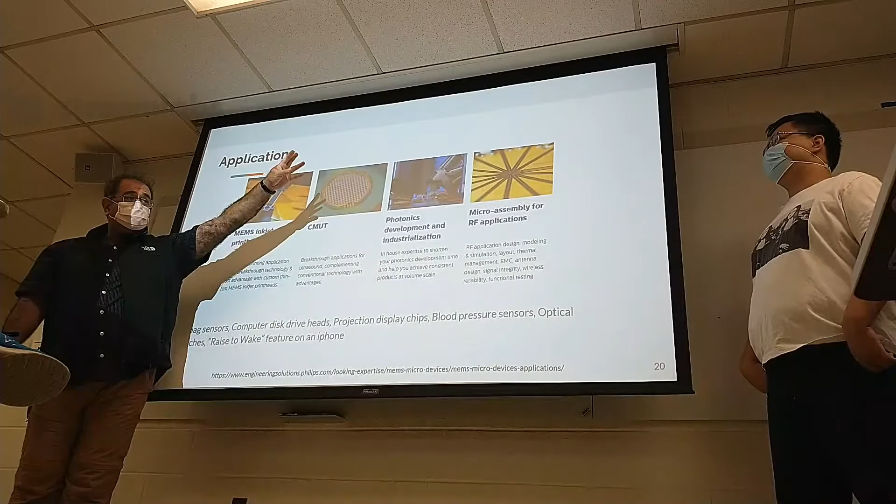There was a long article in New York Times this morning about this metaverse. People are now getting married in metaverse. It's crazy. So the bottom line here is this virtual reality, these goggles, the guy who gave us money to build this computer science building, he was a dropout, but he made multi-billion. It should not be a good model for you. These things happen 1 in a million, okay?

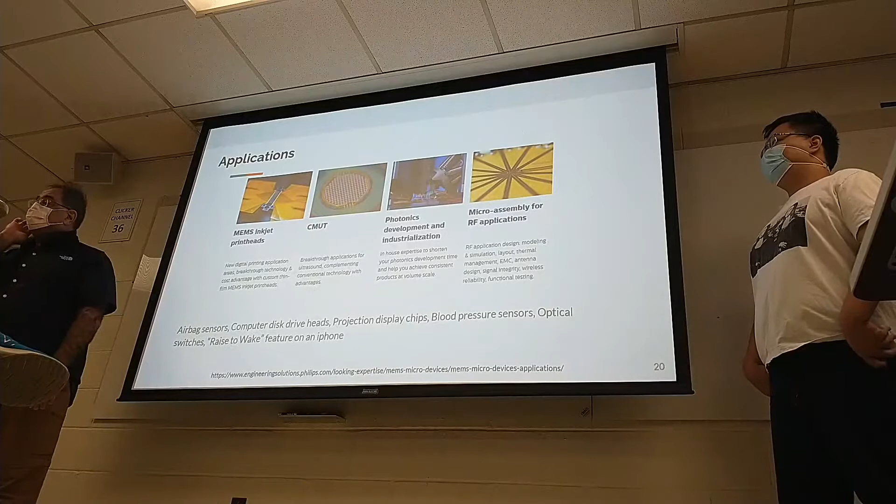But the bottom line here is, he sold the company, he's no longer the owner. But I remember when I had a discussion with him 7 or 8 years ago when he was ready to give us the money, he was very interested in the marriage of MEMS devices with virtual reality. Okay? And God knows what he's doing right now. Now, my former students who work in Facebook Reality Labs in Seattle, they're all working on wearable devices. And they don't tell me what they do. Okay?

So, why this relation between virtual reality and sensors? Why do you think this is becoming? To build a connection. To build a connection, because once you wear this, you're a human, so you feel things, right? You could hear things, right? You could see things, but you cannot smell it, and you cannot touch it, right? So the sensors that they need to make to allow this metaverse world to smell and to touch is all MEMS.

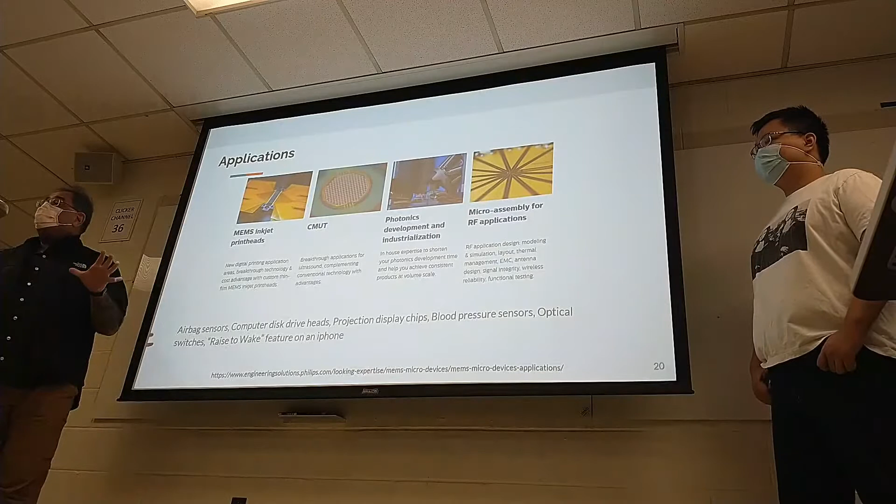Okay? Like smell-o-vision? Absolutely. Absolutely. Because when you walk into a garden in this virtual reality, you want to be able to smell the flowers. Right? So that sensing through artificial intelligence and machine learning and all of this stuff that I don't know anything about, they come into play. But more importantly, I would say, this sense of touch. And tactile sensing. That's all MEMS.

Okay? So accelerometers, gyroscopes, and a lot of this movement which previously was used for robotics, for remote assisted robotics work, they're going to all come together into this metaverse. Does it make sense? She was actually kind of impressed when I explained this to her. But because they're microbiologists, they don't know. But the bottom line here is, as you said, they're everywhere, but there's a new phase of this that is starting to surface, right? So I wanted to share that with you.

Well done. Good job. Justin, can you pull up the screen? And I just want to go over a couple of things before we let everyone go. Excuse me? Yes, I will. So, we have lab report 2 that I hope you're almost getting to the end of. We have the last homework, and we have the homework for today for these 2 group presentations. So I'm giving you an extension until... Wednesday is the exam. So Monday afternoon at 5 p.m. is the absolute deadline. Okay? For all three. For all 3.